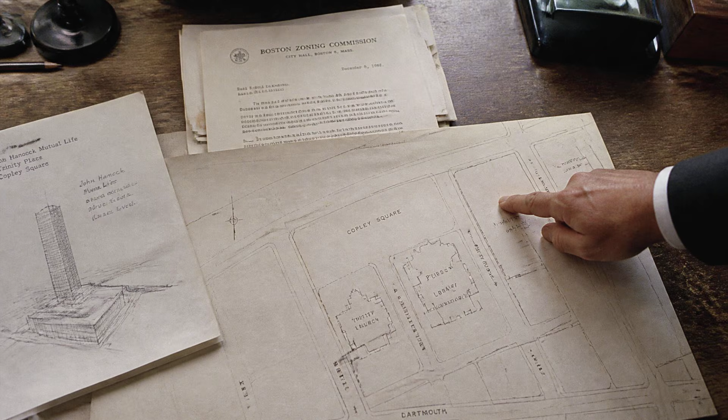Into this came the John Hancock Mutual Life Insurance Company, a Boston institution since the Civil War. Powerful, civic-minded, and by 1965, ready for a new headquarters. Not just a building, the building. According to documented accounts of the commission, there was an implicit understanding that whatever Hancock built would surpass the nearby Prudential Tower in height. 2 insurance companies, 2 neighboring towers, and an unspoken rivalry expressed in floors and glass.

I.M. Pei and Partners was brought in. The project went to Henry N. Cobb, a founding partner of the firm and, crucially, a native Bostonian, a man who had grown up with Trinity Church in his sightline and understood what it meant to build beside it. Cobb designed the tower in a matter of weeks in the fall of 1967. The concept was disarming in its logic.

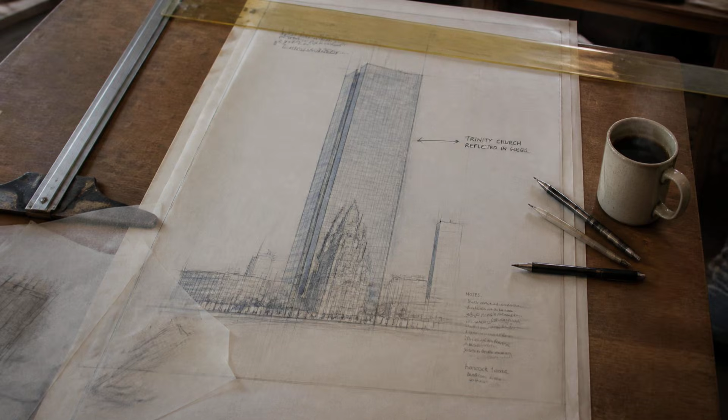Instead of imposing a massive modernist object on Copley Square, he would give the square a mirror, a 790-foot rhomboid prism wrapped entirely in blue-tinted reflective glass with no visible mullions, angled so its thinnest edge faced Trinity Church, a building that appeared to dissolve into the sky. One that would reflect Richardson's brownstone towers and the library's granite facade back at themselves, rather than competing with them. The building's silence, Cobb argued, was its argument.

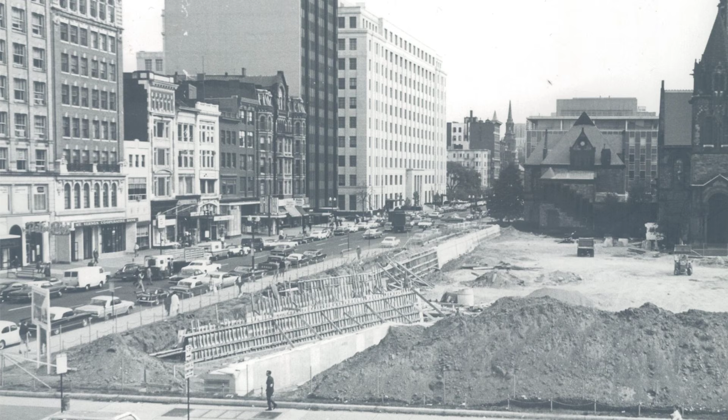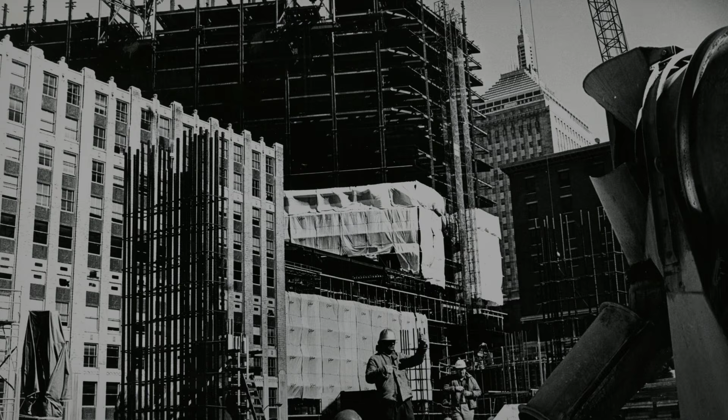The design was unveiled on November 27, 1967. Boston's architectural community was divided. Many considered it wrong, morally, aesthetically, historically, to place a modernist glass tower on the sacred ground of Copley Square. Trinity Church grandees opposed it, but John Hancock was a major employer with significant civic weight, and the project was approved as designed. Groundbreaking began in August 1968. The scheduled completion was 1971.

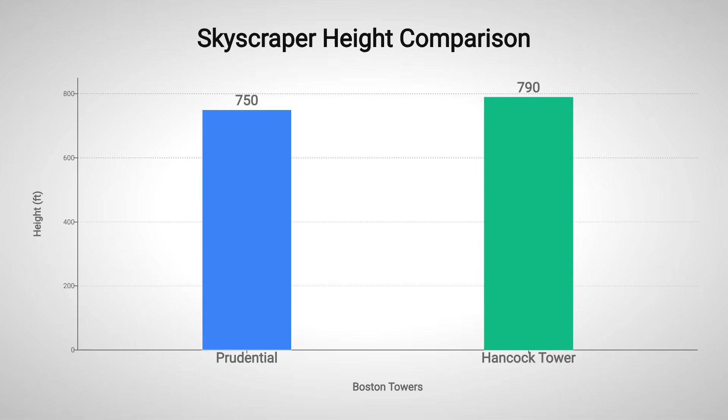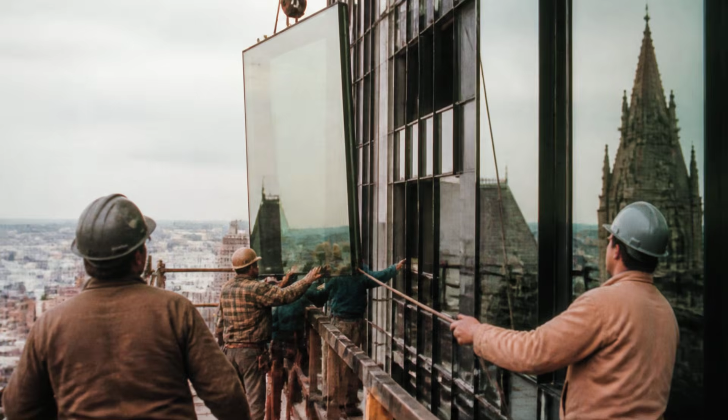At 790 feet, the Hancock would be the tallest building in New England, beating the Prudential Tower by 40 feet. 60 stories of glass that would become, its supporters promised, the largest color field painting anyone had ever made. Always beautiful, always changing, always reflecting the city back at itself. The glass skin was the conceptual heart of the entire project.

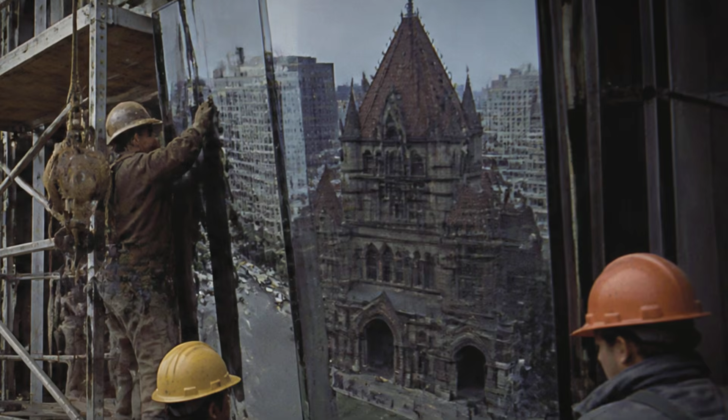10,344 panels of dual-pane insulating glass, each one 4 feet by 11 feet, each weighing 500 pounds. The system was technically novel at this scale. A reflective chromium layer between 2 panes of glass, with a sealed air gap in between, all bonded together with a lead solder system. The effect, seen from the street, was seamless. The building looked less like a constructed object and more like a vertical slice of atmosphere. What nobody had yet confirmed was how that bond would behave once the building was alive.

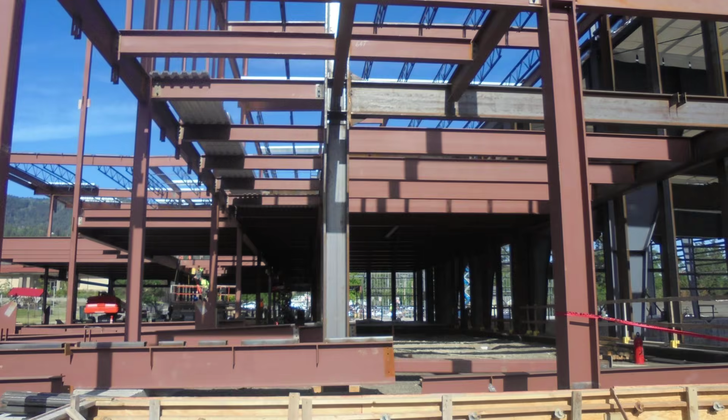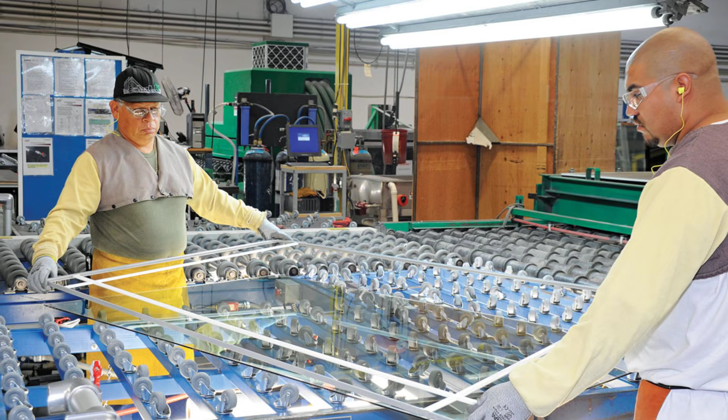All steel frame towers move. They flex in wind. They expand in heat and contract in cold. These are not failures. They are engineered expectations. The glass panels, too, were expected to move slightly. The sealed air cavity inside each panel would expand and contract with temperature changes.

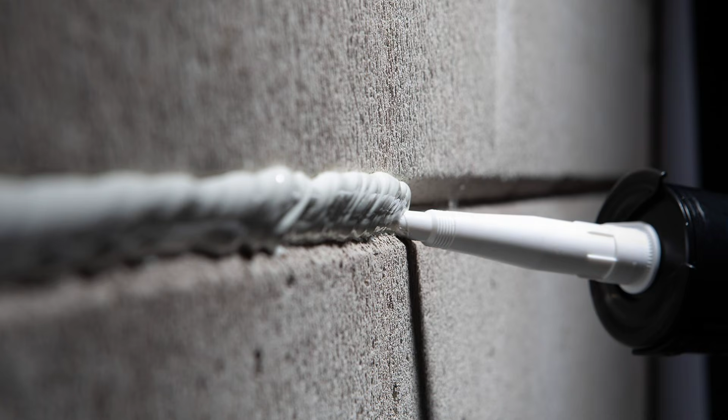The bond between the layers was supposed to accommodate those movements, absorbing the stress so it never reached the glass itself. The bond did not absorb the stress. It transmitted it. The sealant was too stiff. When the building's steel frame flexed, tiny movements, fractions of an inch, the rigidity of the bond transferred those forces directly into the outer glass pane.

When the sealed air expanded in summer heat or contracted in winter cold, the bond held too tight, pressing the stress into the glass rather than cushioning it. The building breathed, but the glass could not breathe with it. And glass under repeated, unrelieved stress eventually cracks. The cracks began at the connections between the panels and the frame. Invisible at first, building over months.

By 1971, sporadic breakage was being reported even as construction continued. Some instances appeared to have explanations. Others did not. The problem was noted. The cause was not yet understood. Then came January 20th, 1973. The storm found every microscopic weakness simultaneously. The panels did not simply crack. They let go. And as each panel fell and struck the ones below, it created a chain reaction that the structure had no way to arrest.

By April of that year, more than an acre of the building's glass face had been replaced with painted black plywood panels. The holes spread across the facade in irregular patches, each one marking a place where the design had failed. Boston gave it a name immediately: the Plywood Palace. The mockery was reported nationally. The most celebrated architectural project in New England looked like a condemned building undergoing emergency triage.

Police continued closing the surrounding streets whenever wind speeds reached 45 miles per hour, a threshold that New England winters cross routinely. Workers, pedestrians, and the neighborhood adapted to the reality that the tower above them was not reliably attached to itself. MIT's Wright Brothers Wind Tunnel, under the direction of Frank H. Durgin, built a scale model of Back Bay and an aeroelastic model of the tower to investigate.

The wind tunnel work revealed something that had not appeared in the original calculations. The building was experiencing unanticipated structural twisting. That finding raised its own alarm, but it could not explain the glass loss. The glass failure had a different cause, and it took an independent investigation to find it. Simpson, Gumpertz, and Heger, an engineering firm brought in to analyze the fractures, conducted post-breakage analysis of the glass surfaces. Their conclusion confirmed what the manufacturer, Libbey-Owens-Ford, had denied. The fracture was rooted in the design of the insulating glass units themselves, not the manufacturer's execution of a good design.

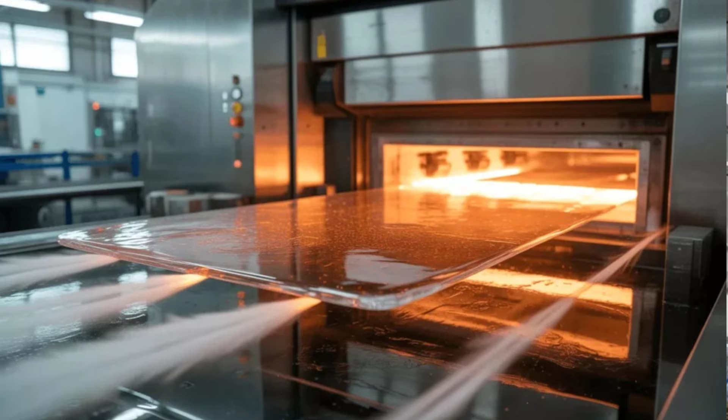The design. In June 1973, architect Henry Cobb formally notified the Boston Building Commissioner that the panels were defective. In October 1973, I.M. Pei and Partners announced that all 10,344 panels would be replaced with single-pane, heat-treated, tempered glass, a fundamentally different system. The replacement cost fell between $5 and $7 million. Reglazing was completed by May 1975.

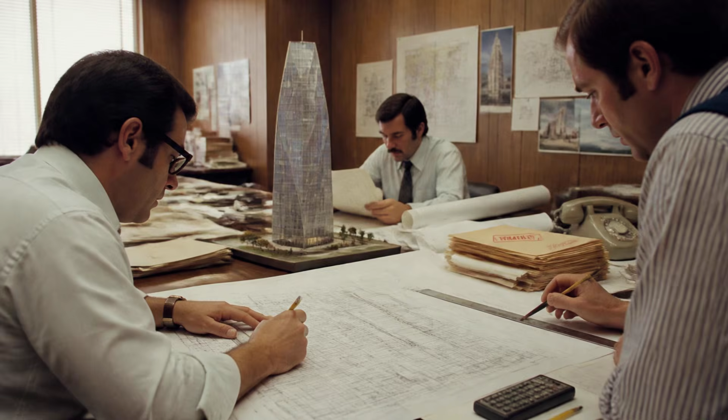The glass was the story everyone could see. What was happening in the engineering files at the same time was the story nobody talked about publicly. As the reglazing work proceeded, Cobb reached out to Bruno Thürlimann, a Swiss structural engineer described at the time as the world's leading authority on high-rise steel frame buildings. As Robert Campbell of the Boston Globe reported in 1995, Cobb's message to Thürlimann was direct. "We are in trouble. Can you come over?" Thürlimann came. He ran the calculations.

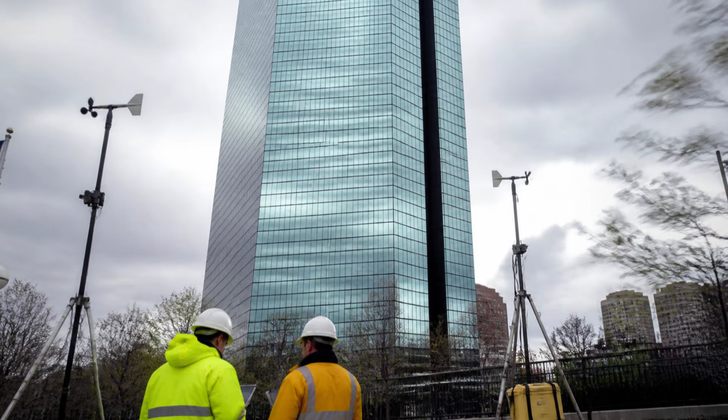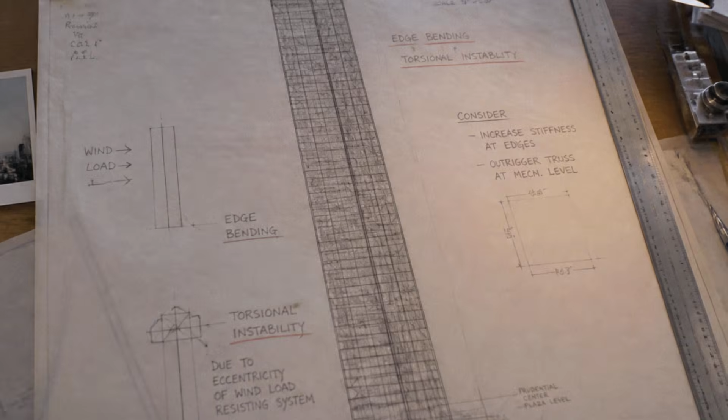He came back with a finding that was not disclosed to the public for years: under certain rare but statistically possible wind conditions, not a theoretical storm, but a type of extreme wind event that could occur within any given century, the Hancock Tower could fall over. Not on its broad glass faces, which the structural system could handle. On its narrow edges, the rhomboid profile that Cobb had used to minimize the building's apparent bulk. The design choice that made it look like a thin plane of glass from certain angles had a structural consequence that the original models had not fully captured. Like a book standing on its spine, the building was more vulnerable from the edges than from the face.

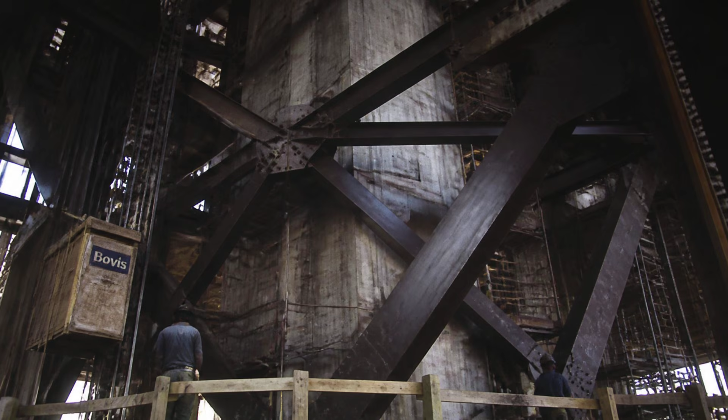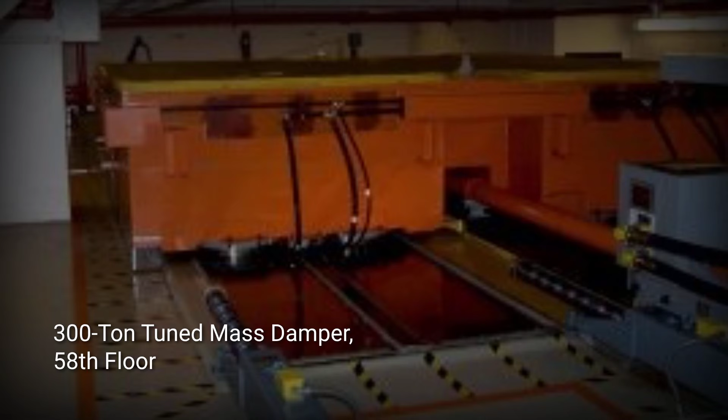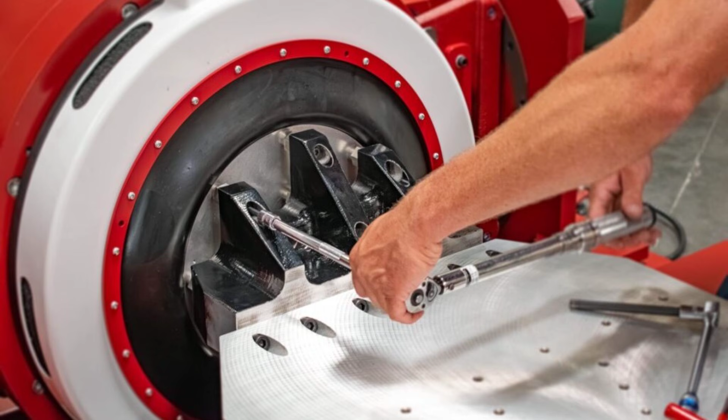To prevent this, 1,500 tons of diagonal steel bracing were added to the building's core at a cost of approximately $5 million. LeMessurier Consultants designed and installed a dual-tuned mass damper system on the 58th floor. Two 300-ton weights, each a box of steel filled with lead, 17 feet square and 3 feet high, sat on lubricated plates at opposite ends of the floor, connected to the building's frame by springs and shock absorbers. When the building swayed, the weights tended to stay still, allowing the floor to slide beneath them. The springs then engaged, pulling the building back. The system cost approximately $3 million.

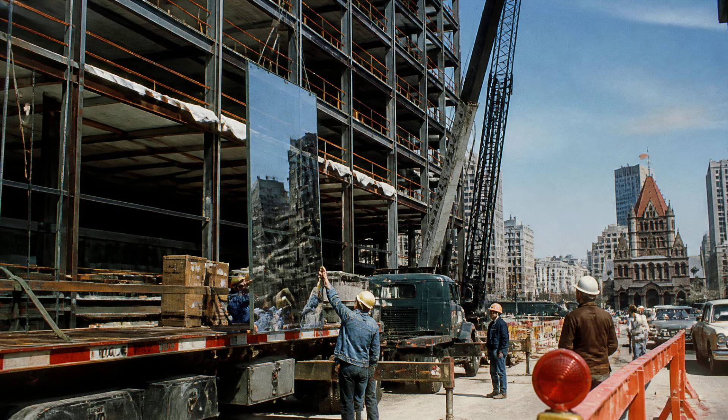It addressed the sway that upper floor occupants were experiencing as motion sickness, and managed the building's response to wind events that the original structure could not fully absorb. These interventions were not presented as crisis management. They were absorbed into the ongoing construction narrative. The structural instability finding remained largely outside public knowledge.

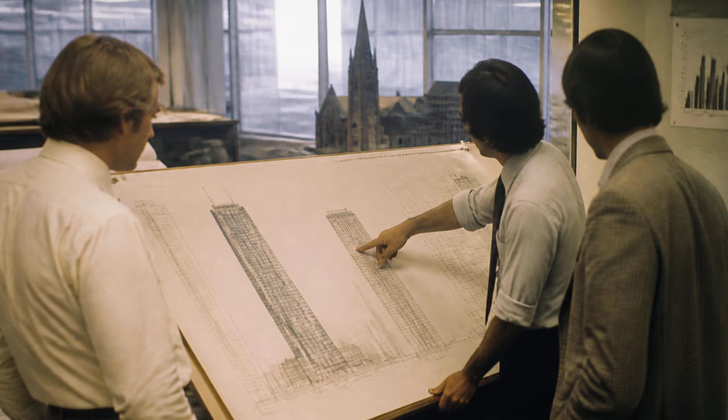On September 15, 1975, John Hancock Mutual Life Insurance Company filed suit against I.M. Pei and Partners, Libbey-Owens-Ford, curtain wall subcontractor H.H. Robertson, and 4 additional firms. A 6-year legal battle began. Trinity Church, meanwhile, was already in court.

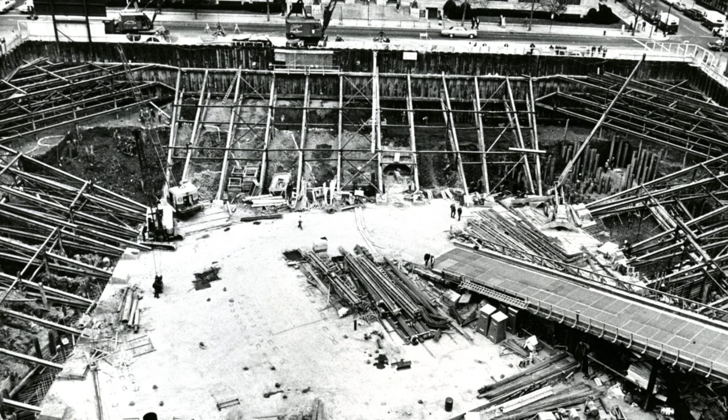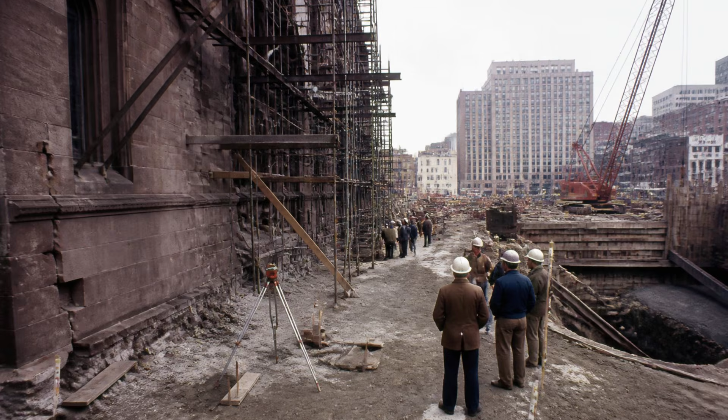The excavation retaining walls had warped in 1968, giving way to the clay and mud fill beneath Back Bay that they were supposed to hold back. The shifting soil had damaged utility lines, sidewalk pavement, and the church's own foundation. Trinity's south side, closest to the tower site, had settled unevenly, migrating toward the Hancock excavation. A spray of cracks had run up through the church's stone masonry.

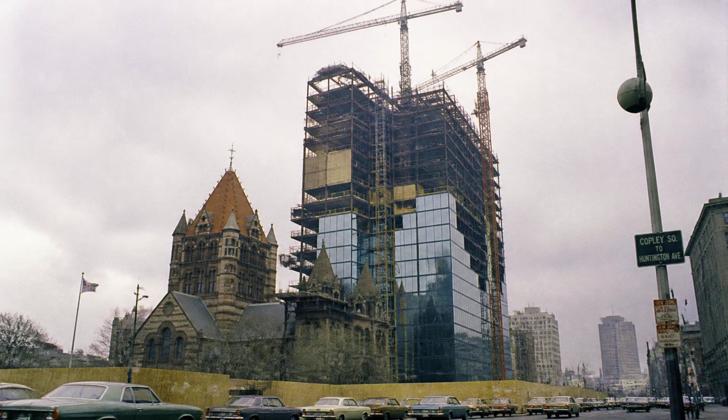Trinity Church eventually won a jury verdict of $4.1 million, with interest growing to approximately $11 to $11.5 million. The tower had damaged the church it was designed to honor. On September 29, 1976, the John Hancock Tower was formally dedicated, 4 to 5 years behind its original schedule, and at a cost that had grown from $75 million to between $160 million and $175 million. It was the tallest building in New England, ringed by active lawsuits, with the structural findings sealed from public view.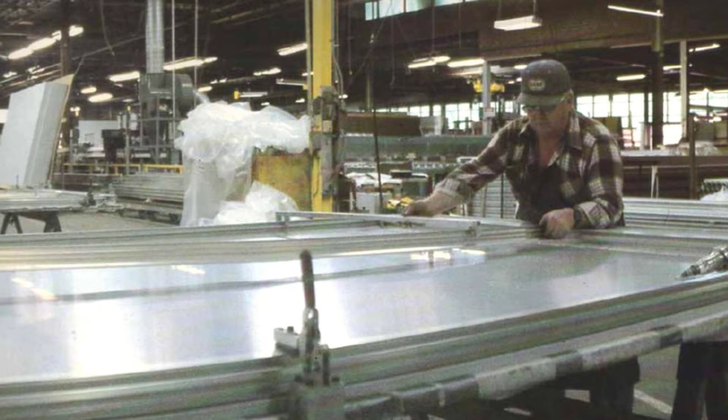In August 1981, the 6-year lawsuit settled out of court. The terms were not disclosed. A gag order was imposed, sealing the confirmed technical cause of the glass failure from public record. Engineers and architects knew what Simpson, Gumpertz, and Heger had found. The glass manufacturer knew. The public did not. Myths and competing theories circulated freely, filling the gap that the legal settlement had created. The legal settlement sealed what the physics had exposed.

For approximately 17 years, the city of Boston had a nationally known architectural landmark whose most famous engineering failure had no officially admitted public cause. The gag order lapsed around 1990. The thermal stress mechanism, the overstiff bond that could not absorb the building's natural movement, was only then publicly confirmed. No finding of fraud or intentional concealment has been publicly established in the record.

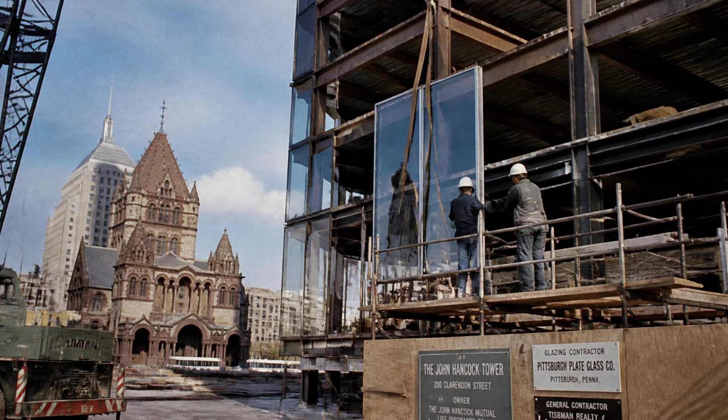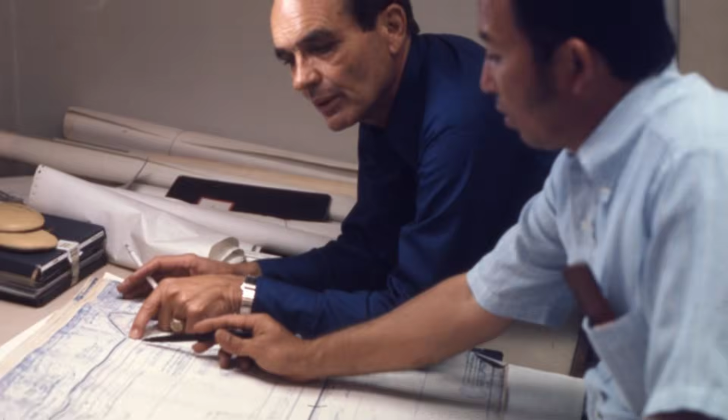What the facts do show is a technically ambitious project in which an unprecedented glass system was deployed at unprecedented scale, with a failure mechanism that required laboratory investigation to confirm, and was not considered predictable under standard practice at the time. And then a legal resolution that was structured to keep the confirmed answer out of public reach for nearly 2 decades.

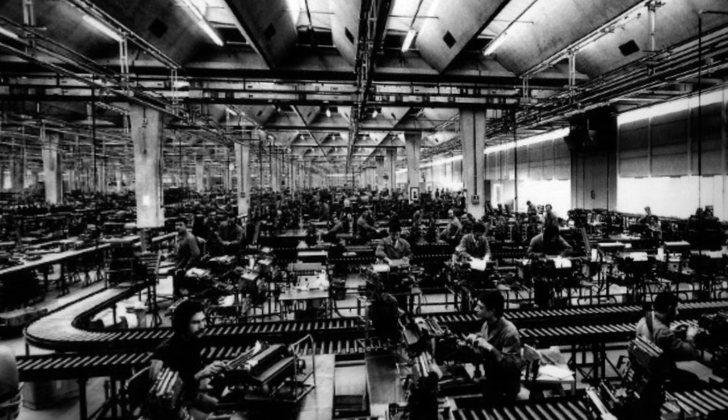The developer commissioned a prestigious firm, received professional engineering, obtained city approvals, and pursued legal action once the failures became apparent. I.M. Pei and Partners settled without admitting liability. The glass manufacturer ultimately paid for the replacement. The building commissioner was formally notified of the defect in June 1973, and the project continued toward completion. Everyone had a position, everyone's position was defensible, and the public record still contains a gap that the gag order placed there. That is what makes the story harder to close than the repairs were.

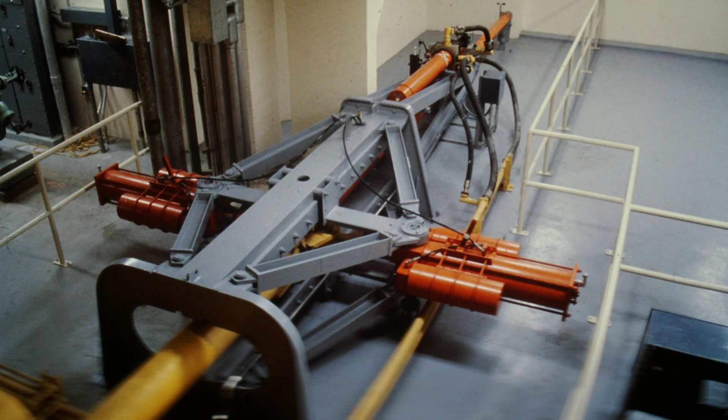The glass holds today. The replacement panels have performed. The 58th floor weights still operate. The building has held its title as the tallest structure in New England for 50 years. Henry Cobb received the AIA National Honor Award for the tower in 1977, 1 year after the dedication of a building he had reportedly not entered for years. Architects, critics, and Boston residents came to regard it as one of the city's great landmarks. The architectural record described it as a strong, energetic, civil presence. Every account of it still begins with the windows.

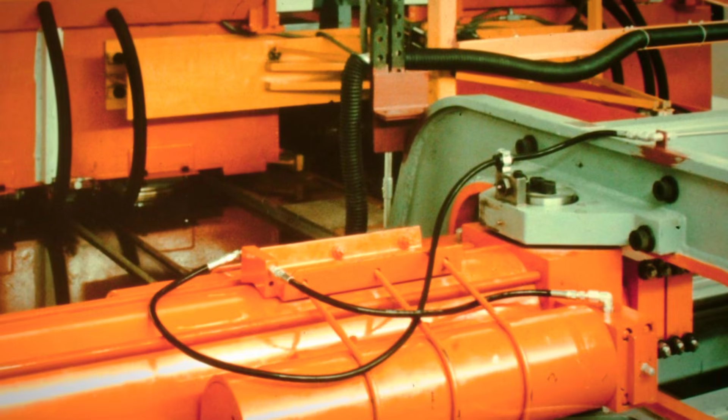Approximately 5,000 of the original panels that were removed intact during the reglazing were later sold for $100 each, repurposed as picture frames, coffee tables, and greenhouse parts. The panels that were meant to be the largest color field painting ever made, the mirror of Boston's skyline, the silent argument for modernism in a historic square, ended up in people's living rooms. Sold for $100 apiece.

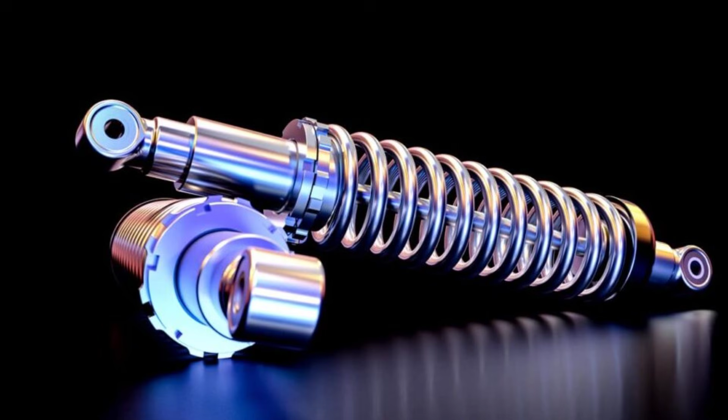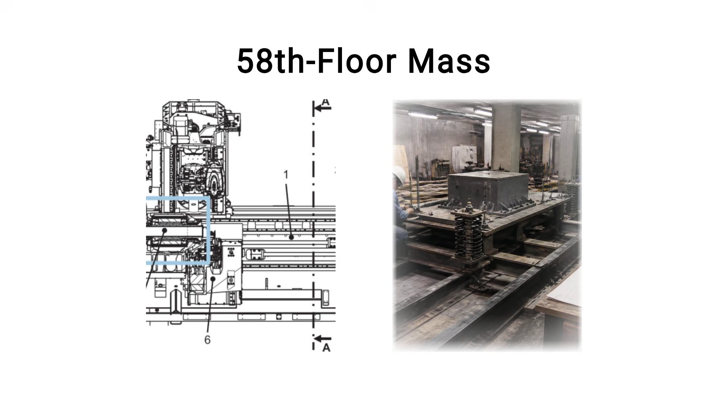What remains of the original design, in terms of function, lives on the 58th floor, in small utility rooms at each end of the building, behind office floors that operate normally. Two 300-ton lead-filled steel boxes sit on lubricated plates in the dark. They are connected to the building's frame by springs and shock absorbers. When the wind builds against the tower's narrow edges, the building wants to move. The weights stay still. The floor slides beneath them. The springs engage. The building is pulled back. The fix is not a repair. It is a negotiation, permanent, continuous, and invisible to everyone in the building above and below it.

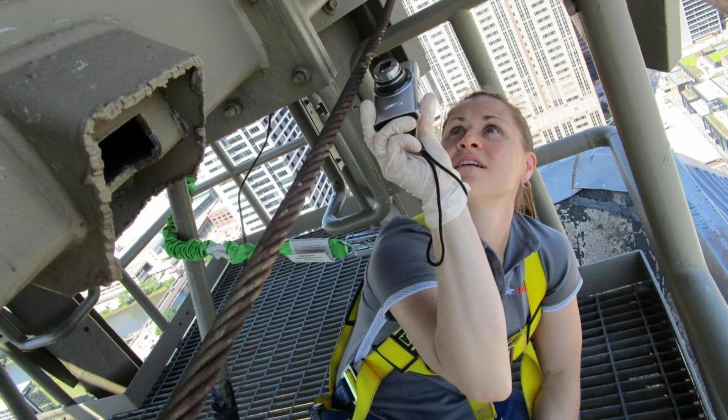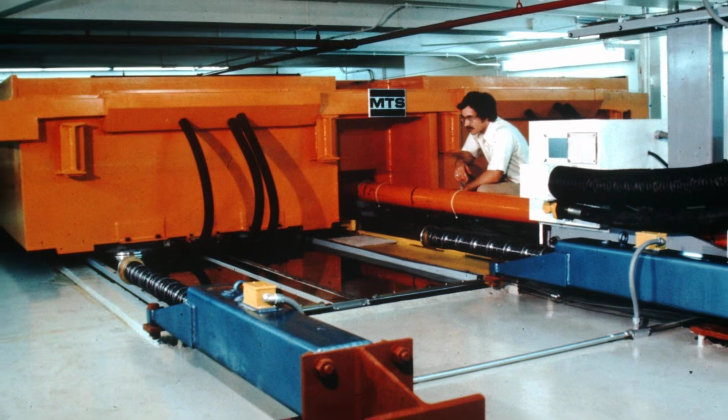The tower was made safe. But it was made safe in a way that requires the safety mechanism to keep running, indefinitely, for as long as the building stands. The original structural condition was not eliminated. It was counterbalanced. The building is still there. The weights are still moving. And somewhere in the space between what was promised and what was built, between what the design intended and what the physics required, between what the legal settlement sealed and what the engineering eventually confirmed, the real story of the John Hancock Tower has been sitting quietly for 50 years.